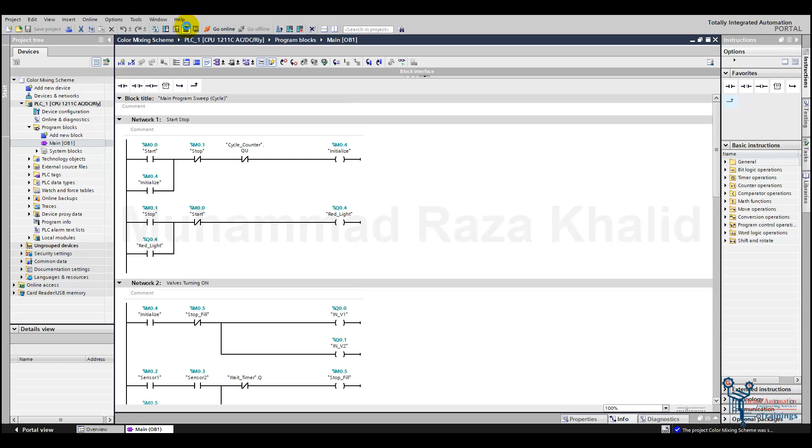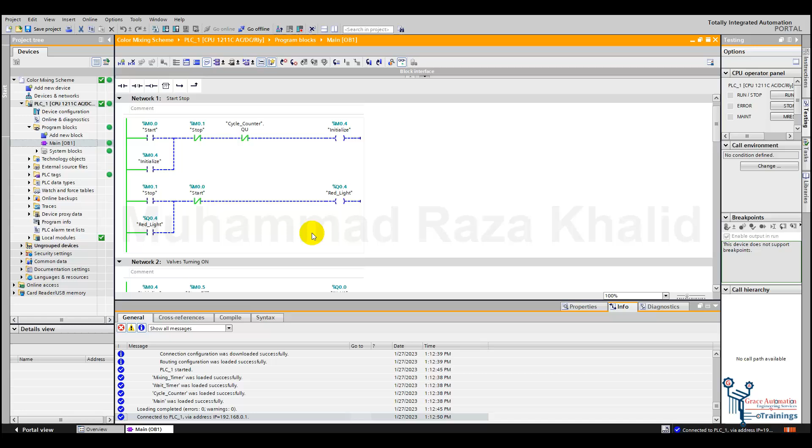So let's move towards the TIA portal. Here we have designed the logic to control the system. Here is the start button, stop, and the valves outputs and the sensors inputs. So let's turn on the simulator so that we can test the logic. Now let's monitor the logic. First of all, here we can see that all the outputs are off. Valve V1, V2 are off, V3 is off, motor is off.

So let's press the start button. Here we can see that after pressing the start button, valve V1 and V2 are turned on. So valves are on and color from these pipes is being poured into the tank. Now let's suppose that the liquid level is going up. Firstly, sensor 2 will be detected. So let's turn it on, and then sensor 1 will be detected. Here we can see that when both of the sensors are turned on, V1 and V2 have turned off and the motor has turned on.

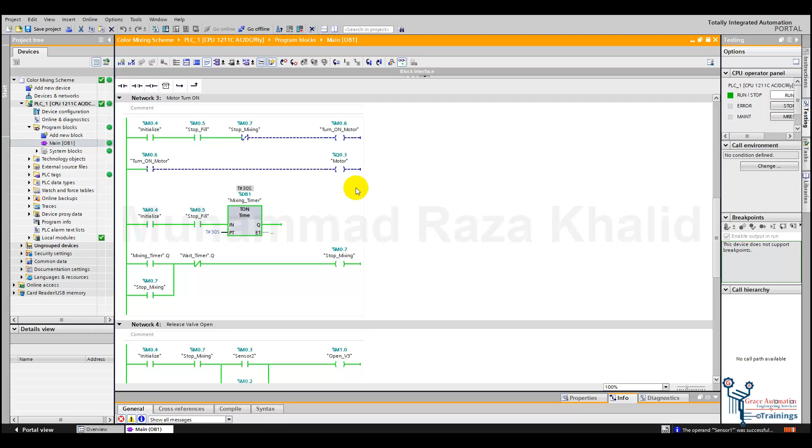The motor will keep on for 30 seconds. Here instead of 45 seconds I have taken less time so that we may test it in short time. So here the motor is on, and after 30 seconds the motor will turn off and valve V3 will open. So here we can see that valve V3 is open. Now the motor has turned off. Valve V3 is open, meaning the mixture is going out of the tank, so the level will go down and these sensors will be turned off.

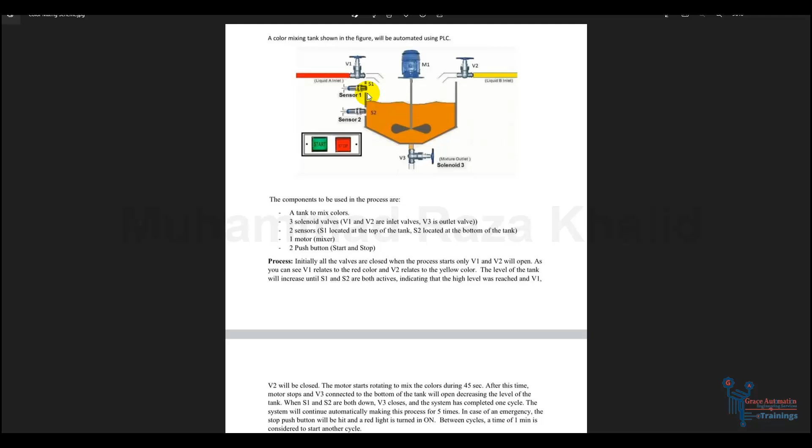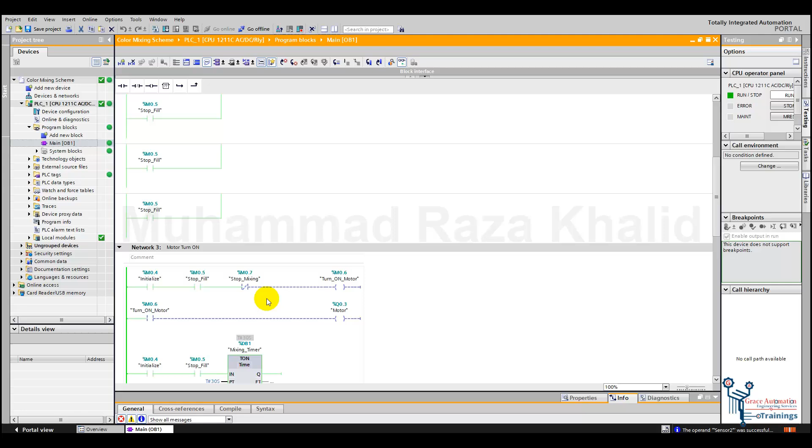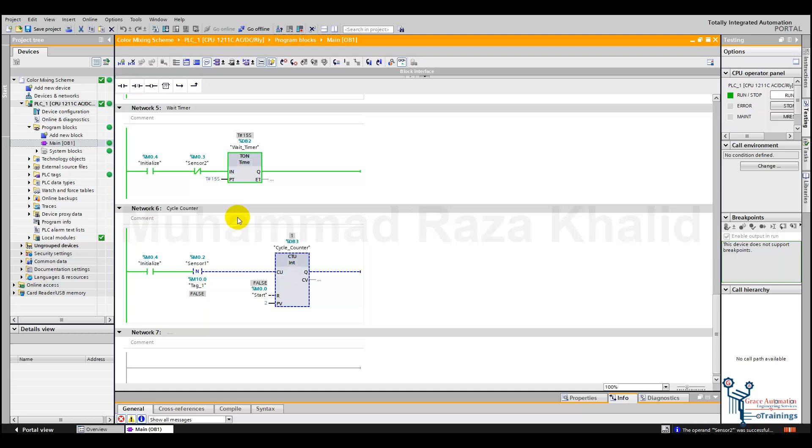So firstly sensor 1 will be turned off and then sensor 2. So let's turn these off. Sensor 1 off, then sensor 2 off. Here we can see that valve V3 has turned off and there is a wait for 15 seconds to start the next cycle. After the 15 seconds we can see that valves V1 and V2 have turned on. Here for the testing, after 2 cycles the system should stop and wait for the start button. So 1 cycle has completed. Now after the 2nd cycle the system will stop and wait for the start button.

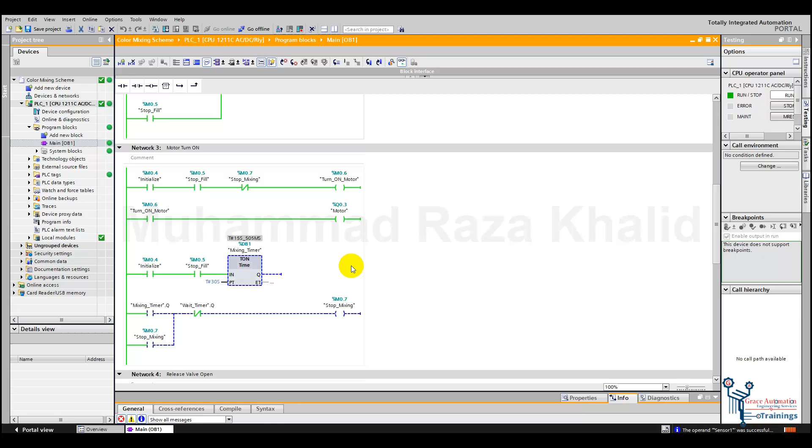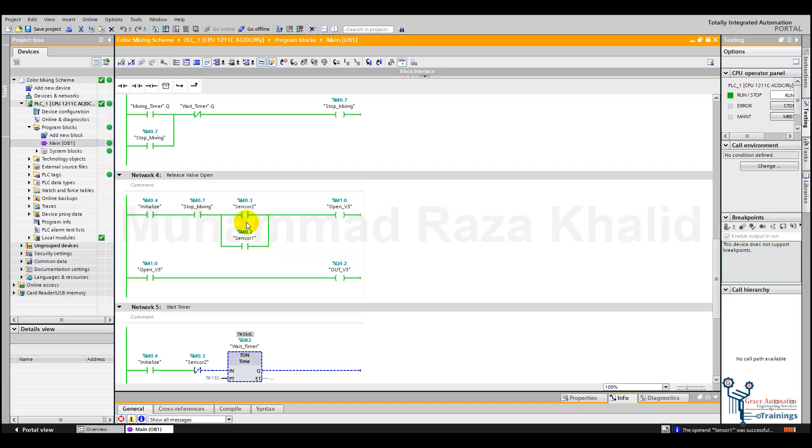So let's turn the sensors on again. Firstly sensor 2 and then sensor 1. So now the motor has turned on. It will keep on for 30 seconds mixing the material and then the mixture will be poured out. Here we can see that now the valve V3 is open. Now turn off the sensors. After turning off the sensors you can see that the valves are turned off, but the cycle cannot be started again until the start button is pressed again. So after the 2 cycles we need to press the start button again.

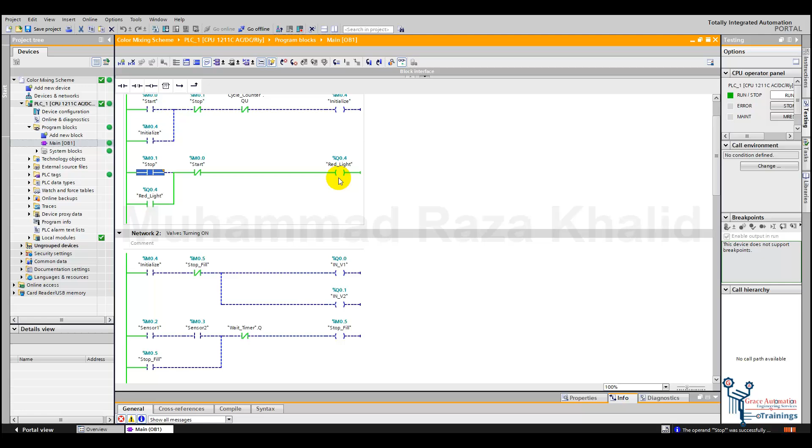Here we can see that after pressing the start button valves V1 and V2 are turned on again. Now let's test the stop button. If we press the stop button, we can see that the valves that were previously on are turned off and a red light has turned on. No output is on at this time, and a red light is on. To start the system again we need to press the start button again. So let's press the start button. Pressing the start button, the system has started again. So the logic is working fine.